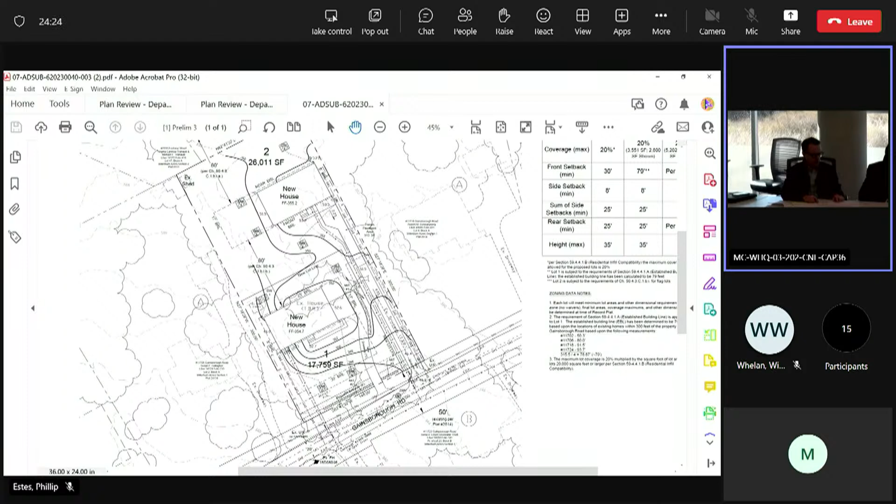Is it also like a visibility issue, is that what you were getting at? It's really just the relationship of the driveway to the home. If you're coming in on the low side and trying to get into the garage on that low side, you end up having to create a big fill area, or put the garage in the basement, which nobody really likes. You can see the contours on that front house where the grade slopes down, because we have that change in grade there. It's not a steep property, but it does have elevation change from right to left, so that becomes an issue.

If you can move the driveway over further away from that property line... and you mentioned maybe using the existing driveway, which is actually right up against that line, so whatever we'd be looking to minimize and avoid impacts from that perspective. I can't speak to that, but just understand we'd have to really be able to make those variance findings and be convinced that there's not an alternative.

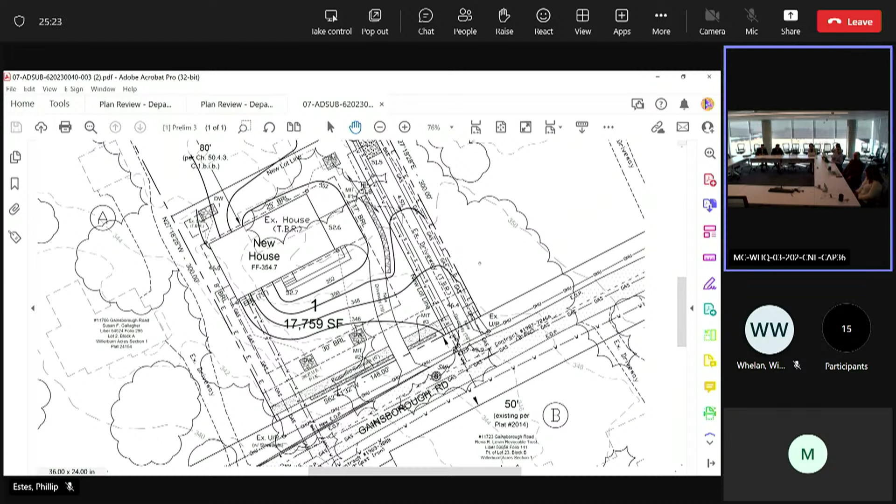So just to elaborate on that point, by using the existing driveway, are you saying that you minimize impacts to the trees surrounding the existing driveway versus having a shared driveway off the property line, which would be a new driveway?

I think that makes sense because we're talking about the driveway that's already there. It's in pretty good shape, it's paved, it would need some widening, and some work for the fire department if it was a shared driveway. We'd have that to deal with, with a wider apron at the front. We'd widen it away from the property line, definitely in that direction. And then you'd have the extension that goes towards the rear, and that's new, not there now, but it goes back quite a ways.

I kind of highlighted it there in yellow, that's where the existing driveway is. It's hard to see on the plan, but it actually goes back beyond those big trees.

What I was most concerned about when we prepared the plan was the utilities we were showing in that area, knowing we'd have to trench through, and maybe we do boring versus trenching for that, or maybe move some of those to the other side perhaps. I was more concerned about those than the driveway.

Yeah, this is Atiq from DPS. We do support the shared driveway comment that was made, I think that makes sense. I think all the reviewers are in agreement that the driveway needs to be shared.

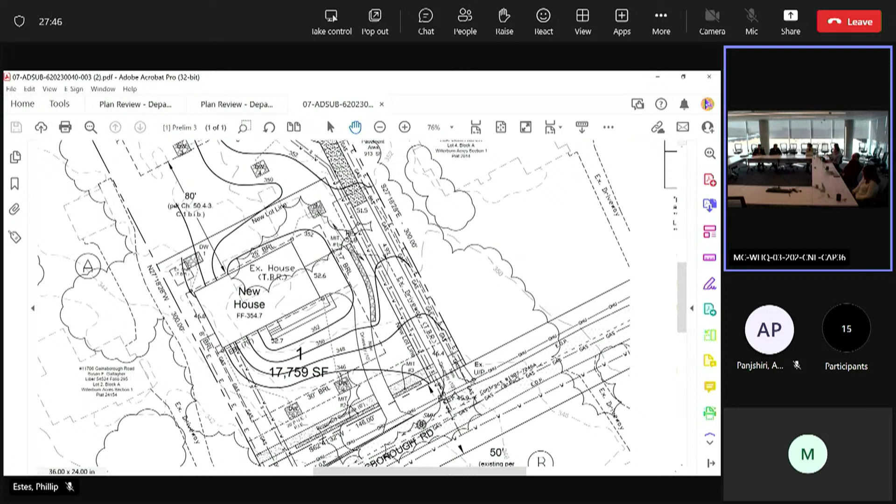So I think if you can demonstrate that you're still protecting the trees and minimizing impacts on the right-hand side, I think that we can potentially support that, as long as it's a shared driveway. I think that's really important.

When you say shared driveway, to what extent - we don't want to get into a turnaround situation with the fire department. 150 feet is our max for shared, which I don't think we'd be running into at this point. Is it the apron mainly, just to not have 2 points of access on Gainsborough that's important?

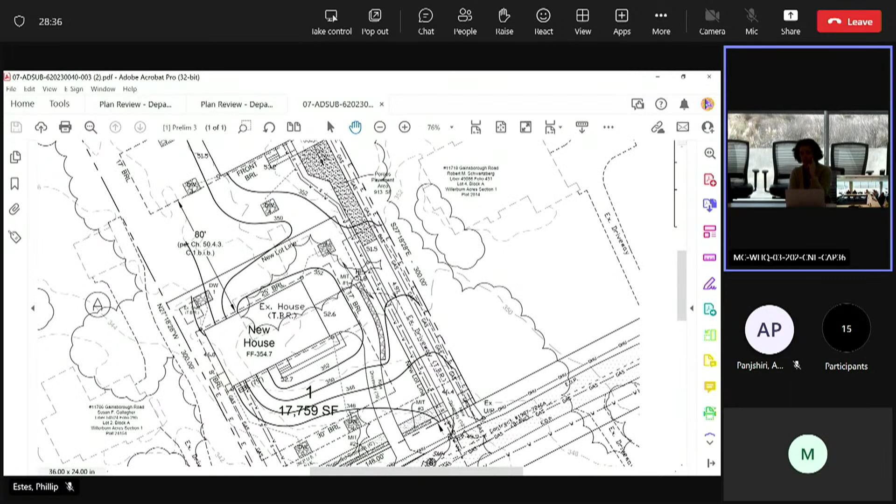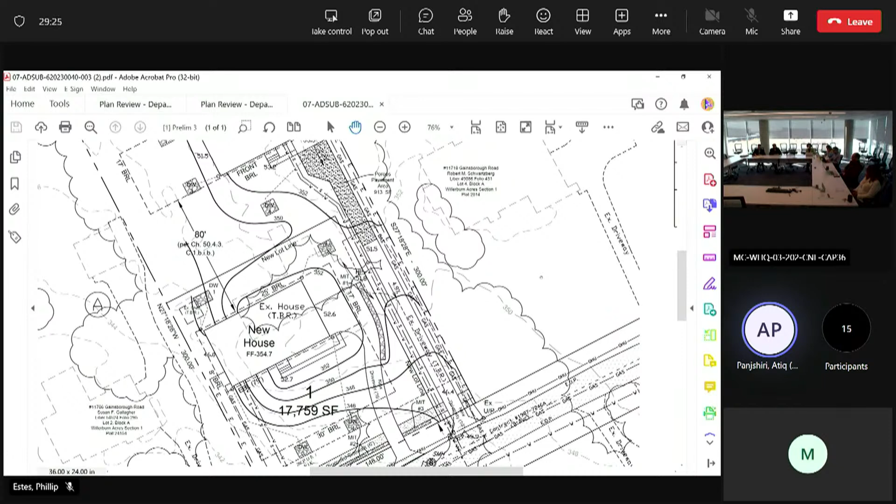If they can accommodate or use the existing driveway as a shared driveway, that will be preferred - the impact on the tree is very minimal. But if that cannot be accommodated, the existing driveway has to be removed and perhaps the new driveway needs to be shared. Our main concern is the curb cuts - 2 curb cuts - and if it's shared, that would be preferred.

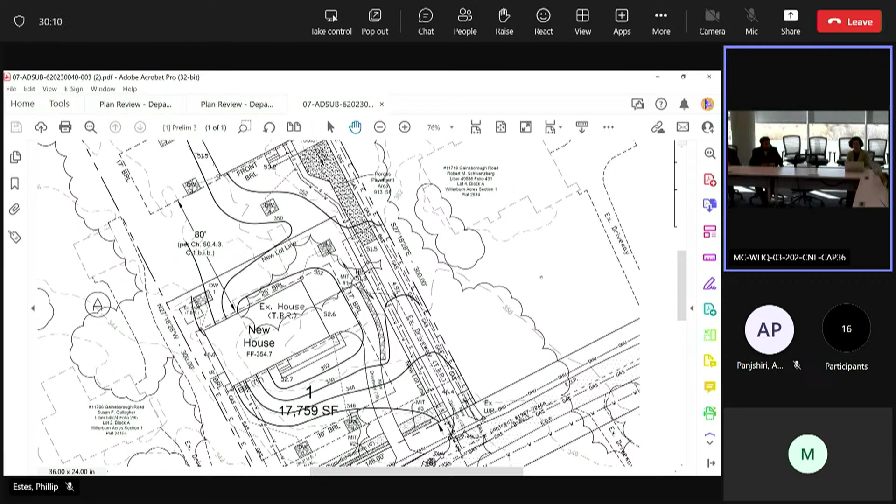Okay, next - I guess these are kind of related to the 15-foot BRL for fire, but also we want to talk about positioning the front house perhaps a little closer toward the street to provide more of a rear yard. That may also be related to Melissa's comments about the infill development not applying here.

Yeah, I'm online. I just wanted to let you know, it's Melissa Goutos from DPS. I'm online if there are any questions.

Great, thank you. So I think we've interpreted the EBL, established building line setbacks, correctly. I don't think we have any relief from that, given the requirements in the code section you referenced. So I think our front setback for the front house is what we show. I don't expect we can move it forward any - we certainly would if we could, but I don't think we can.

And Melissa might want to speak to that. Yeah, for EBL there are multiple methods for determining it. So we could meet and go over the different methods to see if you can bring the house up further to the street the way they're recommending.

Okay, I'll reach out to you and just make sure we're on the same page with that. That would be great. Okay, I'll put my email in the chat just to make sure you have it. Thank you, great, thank you.

What we could also do, if it ends up being that the front house stays where it is, we could move that lot line back some, keeping the setbacks where they are because of the 80 feet separation we have to adhere to, but move the lot line since we have some extra acreage in the back lot.

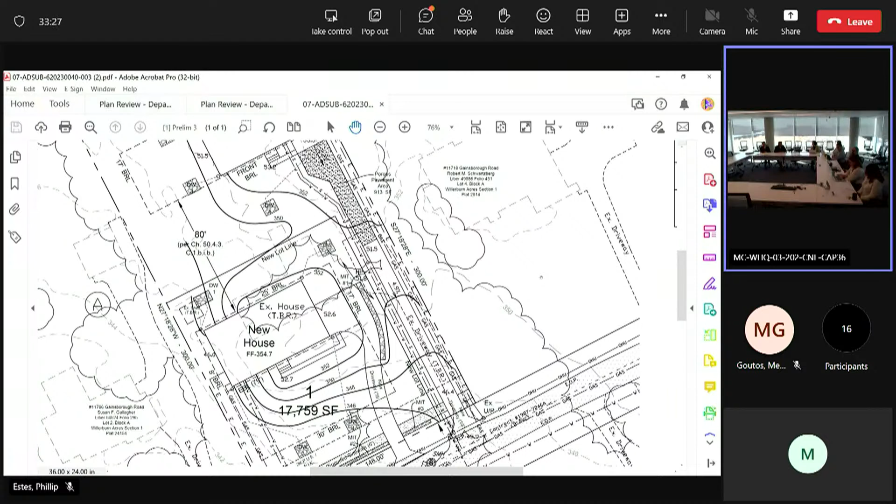From a design perspective, we always like to reduce that width as much as possible, as well as the turning radii. So if you find it helpful to have us on the conversation, then Maria would be happy to join.

Okay, all right. We can move on to transportation. We have DOT here. Yes, Billy Whelan with DOT.

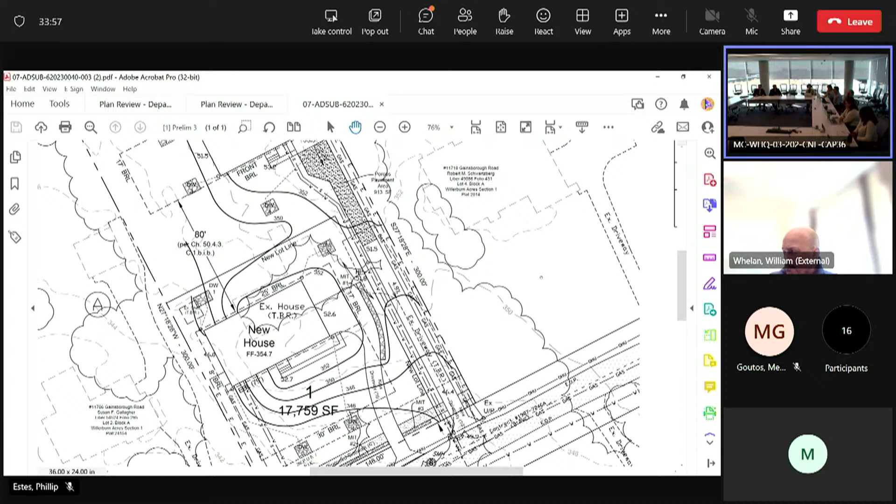Billy, I saw your comments about the road section. If you could explain that a little more, what you're looking for there per complete streets. So it's a 10.5 foot travel lane, but if it's 20 feet of paving, then 10 feet is acceptable. So it would be 10 foot of travel lane on your side of the center line, then curb, then a 6.5 foot green space buffer, then a 6 foot sidewalk.

Okay, so we're going with curb and gutter here versus open section? Yes. Okay, gotcha.

And then that sidewalk would extend off-site. Correct, to the west across that adjacent neighbor's house, and meet the existing sidewalk at the next house. I'm not sure what that address is, but I think the first two homes off of 7 Locks have a sidewalk. They're still discussing moving the sidewalk to the other side of the street. I don't know if that's going to happen.

They're building sidewalk on Gainsborough Road, and that's the review happening now. A lot of the neighbors wanted to move the sidewalk from that side of the street to this side, on 11712. So that could happen as well. The board meeting and neighbors prefer it this way because there's less impact on trees. But the proposal was on the other side of the street, so it's possible it would be moved to this side.

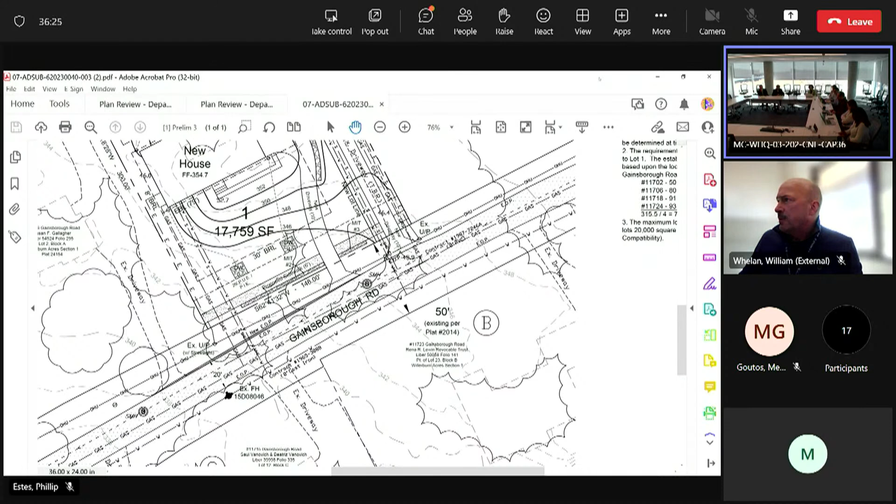Brett, are you on the line here? I don't see him. He's not on. Well, we can look into that and let you know.

I thought we were asking them to extend the sidewalk off-site to the left. They are, yeah, that was our recommendation, right? So why would we be waiving the sidewalk then? Was your question regarding which side of the street the sidewalk should go on?

He's saying there's a DOT project for the neighborhood in general that they've been talking about. You're on the call, so let's ask them about that. Billy, do you have any comments about this, whether the sidewalk goes on the left or right side of Gainsborough Road? I wasn't aware of that.

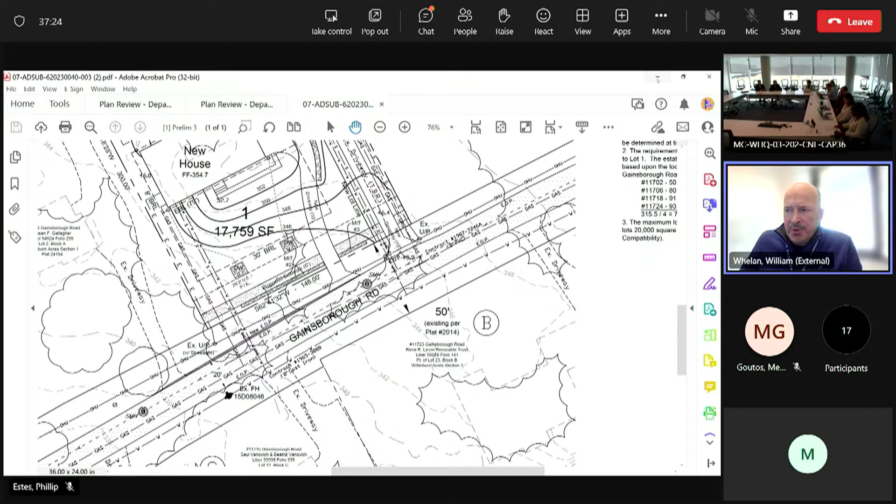We had the same comment, as planning, to put sidewalk along their frontage and extend it across that lot to the west to meet the existing sidewalk for the first couple of houses on the north side of Gainsborough. If you look at the air photo, there's an existing sidewalk that goes 2 lots in, and then you'd create this along the frontage, leaving a 1 lot gap. So it makes a lot of sense to just tie into the existing sidewalk.

I'm not sure why we would waive it. They're trying to extend the sidewalk from the Behrman House, the first house, the big house, all the way through. But neighbors were saying we don't like that, we want to move it to the other side because there's less trees on this side of the street. So it's possible that neighbors will want to put it on that side.

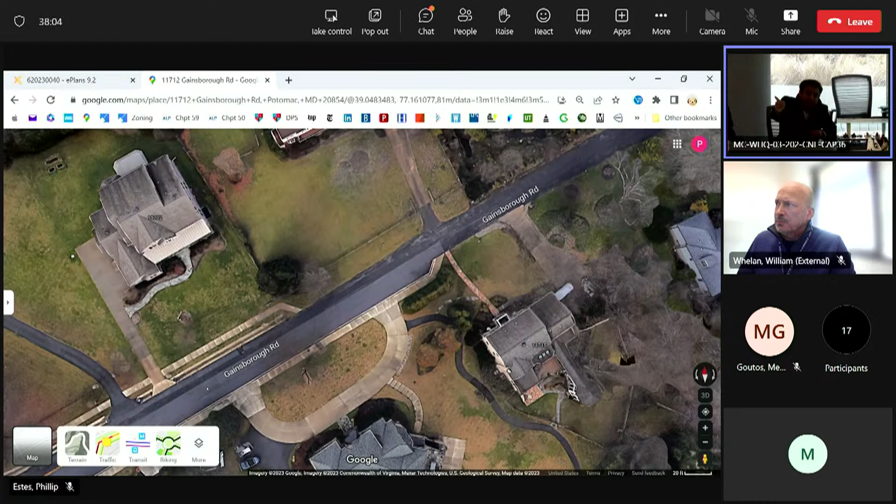Either case, there's going to be sidewalk on Gainsborough, maybe DOT can look into it. Well, the ultimate section would have sidewalk on both sides, so if any of those lots come in for redevelopment, they will all have to put in sidewalk.

You've seen it, they sent the plan out. I have it at home. Yeah, there, you can share that with us. We're more than happy to look at it.

Okay, I think from a general policy direction, we want sidewalks. There's an important connection to be made here, and so that's our recommendation. We're happy to look at what you have, but just keep that in mind.

As of now, they sent out the proposal for this side of Gainsborough, not that side. There may be sidewalk planned on both sides ultimately. They only want to do one side - who is they? The county. The county is here, they're on the call. So maybe you need to communicate with DOT and understand what's planned.

This is Rebecca from DOT. If the county has a CIP, that's one thing - that's asking the developer to put sidewalks on both sides, or put sidewalk on their side of the street and connect into the existing sidewalk. So the CIP is separate from what we actually ask for in development review.

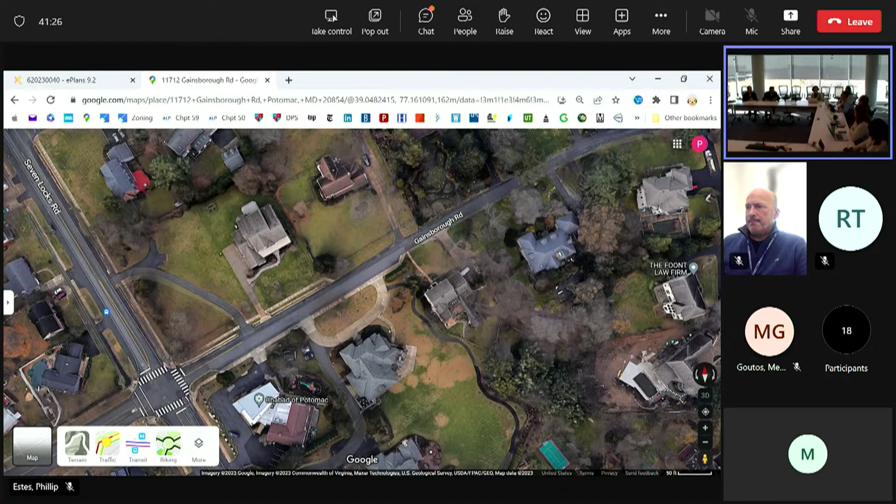For two reasons it's going to the planning board. One is that it's a flag lot, so that has to be reviewed by the planning board. Two, we already have two protests from two different neighbors. Did we share the letters with them, the community letters, or was it just phone calls? I think it was just phone calls.

Do you know which neighbor that was? I know of the neighbors. The first call, she did not identify herself, so I'm not sure who it was. But the second call was from the neighbor to the right. I know all the neighbors on that block, so possibly the neighbor across the street - she's opposing the sidewalk as well.

No, opposing the sidewalk as well - her concern was the flag lot. She was opposed to... I just think he's saying the sidewalk project she's opposing is what I'm hearing. She also opposed the other three lots that were subdivided, lots 1-3.

So she likes to oppose it. But I don't know anyone - I know all the neighbors on that block, and everyone I talk to is happy. They'd rather see a beautiful house there rather than a house with septic and well.

This is Rebecca from DOT. Can we go back to the plan again? Sure.

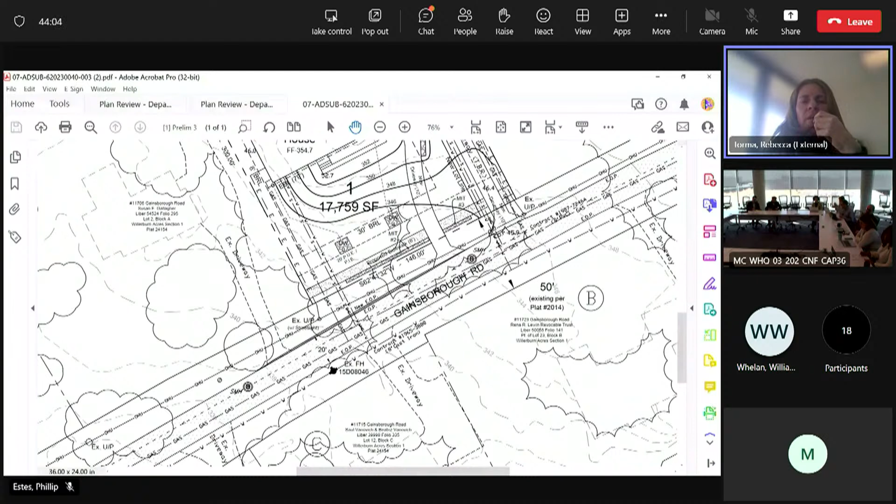Okay, so they need to move the sidewalk inside the right of way. I don't know what that thing is next to the sidewalk - did we talk about that at all? At MIT number 3? That's stormwater management. I don't think we can put that right next to the sidewalk.

I don't know if stormwater management's on the line, but - yeah, Rebecca, this is Mark Etheridge. We've asked him not to put that in there. Okay, so the sidewalk just basically needs to be aligned with what we have down the street, and hopefully it won't be on the curb.

Okay, you got it. Just to finish on the planning board note, I was checking the schedule, and your date would be May 25th. The last Thursday in May is 90 days from the submission date, so keep that in mind.

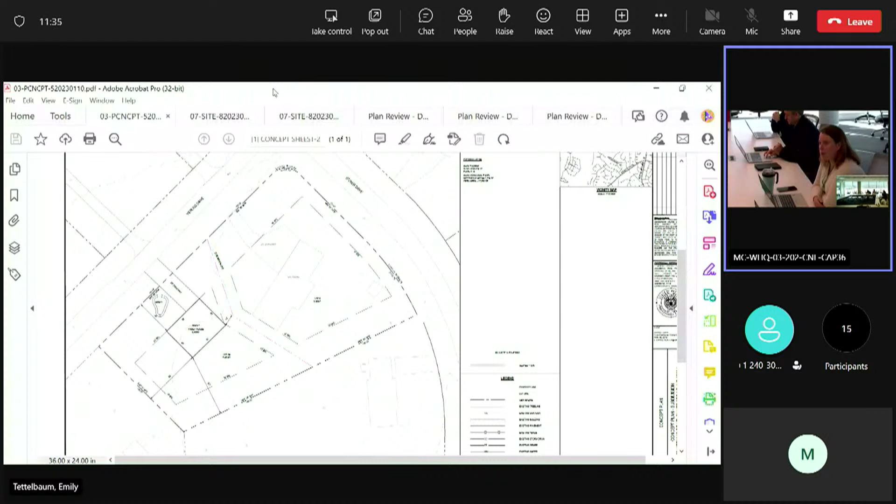The purpose of this meeting is for the applicant to ask any questions they might have based upon the comments you received. I will turn it over to Emily first to highlight some of the larger issues, and then really this is the applicant's meeting. So go right ahead, Emily.

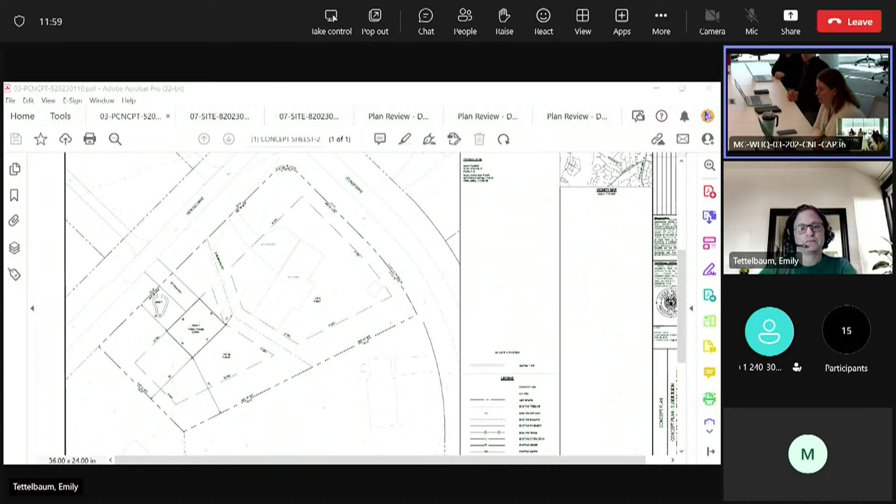Thanks, Christina. Good morning, everybody. Thank you to the applicants for submitting this concept plan to us. It really helps if we can see these projects ahead of an official submission. This is a 2-lot subdivision, and we reviewed it based on the information submitted, and we really didn't see any red flags. We did have a lot of comments from various agencies, and we're happy to answer any of your questions, but I don't see any major comments that we need to flag for you at this point. We're ready for the questions you have for us.

Okay, Leandro? Ivan, do you have any questions as far as the subdivision? This is Ivan with DMV Civil, the engineer that prepared the drawings.

I just had a couple questions as part of the preliminary plan that we have to submit. Do we have to do a brand new NRI and FSD and forest conservation plan for this little minor subdivision, or?

Hi, this is Amy Lindsay. I just wanted to say, yes, you do have to go through the forest conservation process. In order to submit even a minor subdivision, you need to either have an NRI, FSD and forest conservation plan, or a forest conservation exemption. So either you need to go through one of those processes prior to submitting your plans.

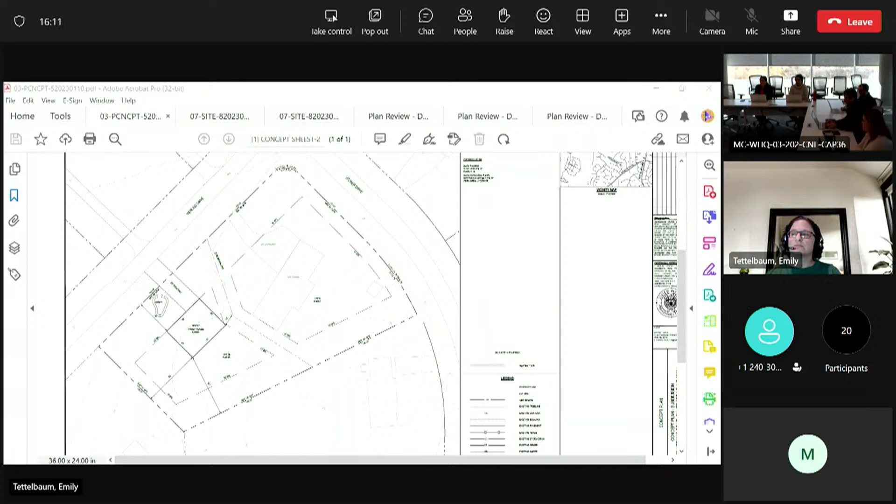And well, I can tell you that this subdivision will not trigger a requirement for MPDUs. You might have to make a payment into the housing fund, but I can find out more information for you about that if you would like. I'm guessing that the housing planner just didn't have any specific comments about this.

Right. So I guess the main question here is that if this is, from what I'm seeing, very feasible - there's pretty much nothing that I can see here that suggests that it wouldn't be approved, right? Based on the information we have right now, we didn't see any other major issues with this. Again, once we have all the information, there might be some additional concerns that come up, but based on what we have right now, this looks feasible, yes.

Yeah, so I mean, I guess the main thing that we want to get out of this meeting is to know if this is something we should pursue or if it's something that's not going to happen.

Well, that decision is up to you, but based on what we're seeing right now, we didn't see any major issues with this subdivision. So, we definitely don't have any major objections to you submitting an application for an administrative subdivision at this point. I mean, not to say that something won't come up, but from our look at this, besides the comments you see, we didn't have any major issues with it.

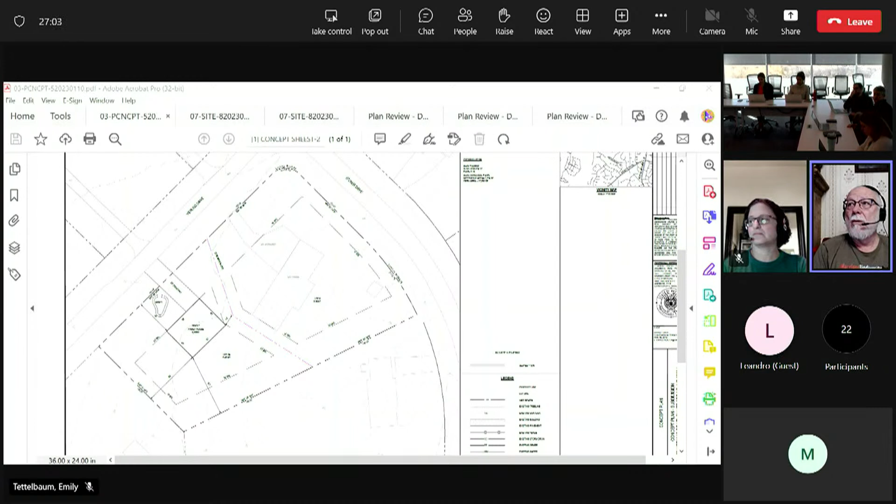So we're not allowed to support a subdivision that requires a waiver for this type of use. We don't know what the house type's going to be, obviously, at this point, so we're looking for reasonableness. Someone comes in 3 years after the subdivision is approved, and it's a lot of record, and they build a house that they can't achieve full stormwater on, we're not going to send them back to the starting gate. But we need to see reasonableness here.

So we're going to do soil testing. It's going to be infiltration testing, not the typing that you probably did before. And if the soils are not good, you'll have to find another method that might be acceptable, planter boxes or something of that sort to provide stormwater management. Okay, all right.

Is there anything else, Ivan, Leandro? No, I'm clear for now. I appreciate all the input. Yeah, we're excited to put this in front of you shortly.

If you like the reference that Rebecca Torma was discussing, it's in the subdivision code. It's 50.4.3.d, and it's about side lot lines. I'm sorry, can you repeat that again? 50? Yes, it's in chapter 50, and it's 4.3.d.

4.3.d. Chapter 50 says side lines of interior lots must, to the extent possible, be aligned perpendicular to the road line or radial to a curved road line. So obviously this doesn't conform exactly with that.

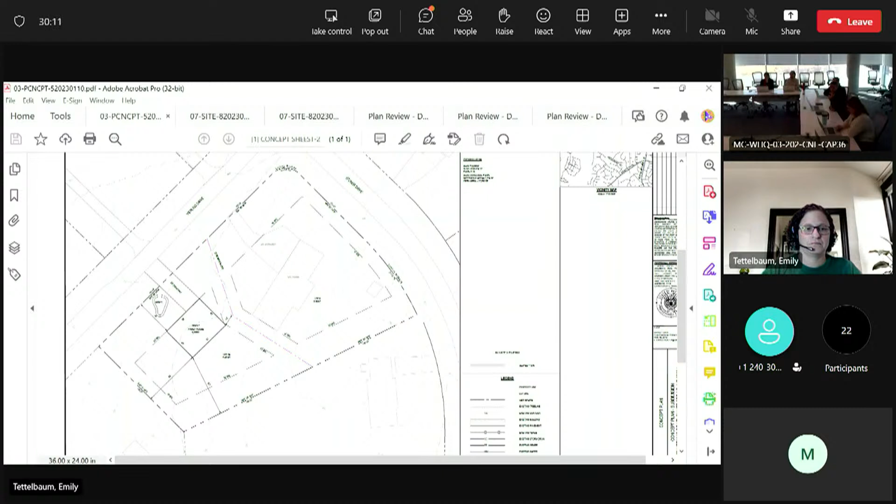I don't have any more questions. Does the county, any of the reviewers, have any other comments? All our comments should be in the document that was sent to you or within ePlans. If anything comes up, feel free to get in contact with me or any of the other reviewers. We'd be happy to answer any of your questions. All right, that does it for me.

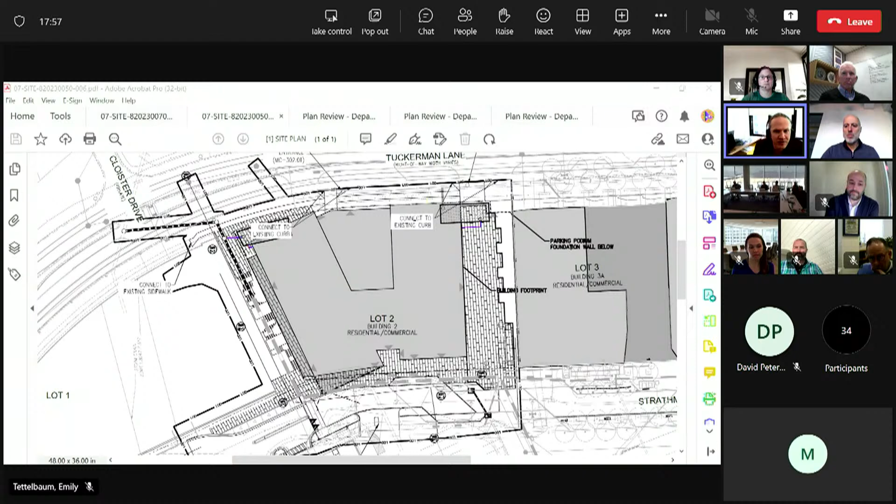Great, thanks, Andy. Emily, can I share my screen? Yep, you should be able to now. Okay, can you see the blue slide here? Yep, we sure can.

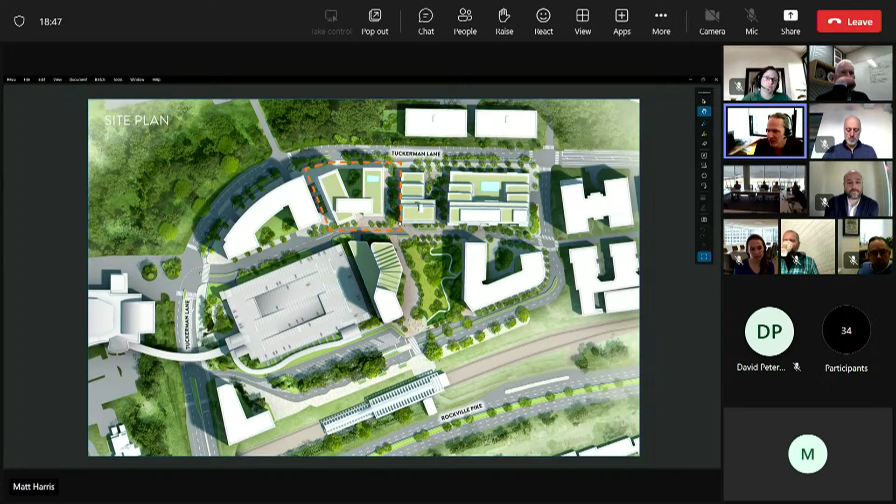So as Andy mentioned, thanks everyone. We have a number of technical comments that the team is responding to, and we identified a few areas for discussion today. The first is on parking. Just to reorient everyone, the site we're talking about is here - this is lot 2, outlined in orange. The building's 2 towers over 1 parking garage in the first phase are under construction now, as is the first phase of the park, which is really the entire 1.2 acre park that faces the metro station. So we are going to talk about lot 2, and following us, the ESL team will talk about lot 5.

One of the things we wanted to discuss was there's a comment in E-plans about our range of parking, and we wanted to speak to why we are requesting a range of parking. I think we are all aligned with the county to strike the right balance of parking here, and probably to the extent we can limit the parking, as this is a transit-oriented development on a site owned by WMATA at a metro station. So we think we're aligned in the limitation of parking. That said, this is outside the Beltway, and so we are trying to strike the right balance of what the residents of this community would need in terms of parking and limiting parking. This early phase of the design, we haven't finished design development yet, and we normally have some coordination issues that come up along the way that affect parking up or down. So we want to respond to that comment as to why we requested the range of parking. It was really driven by costs on our side, trying to thread the needle between the right amount of parking for our residents and limiting the parking, as it's not a huge economic incentive for us to provide.

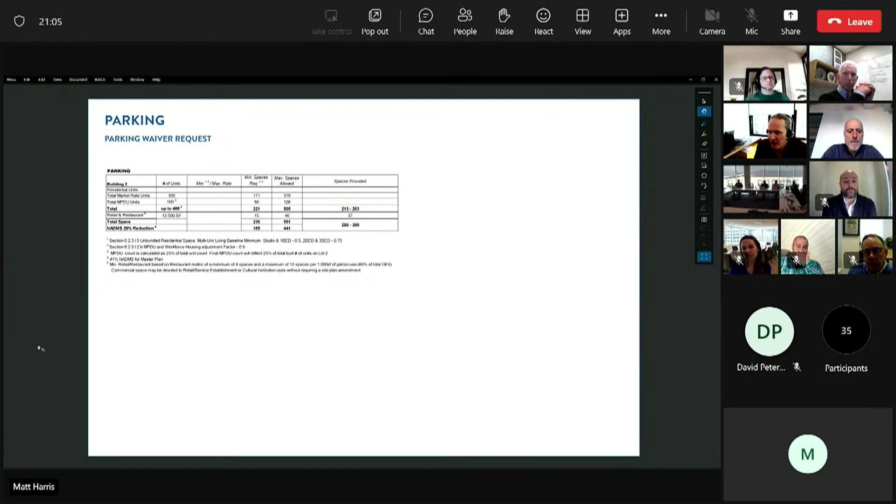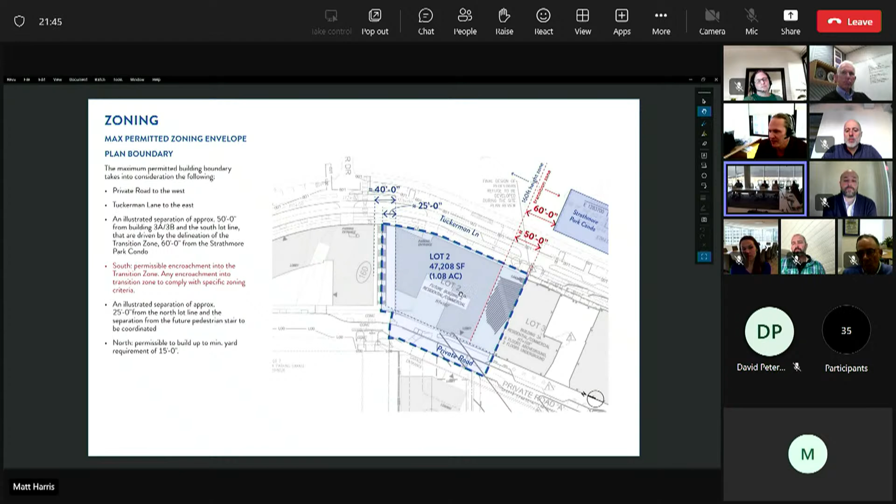We have some very minor bay projections in the transition zone. This diagram shows everything in red, which represents all the massing that would conform to the transition zone if we were to build fully out to the lot line.

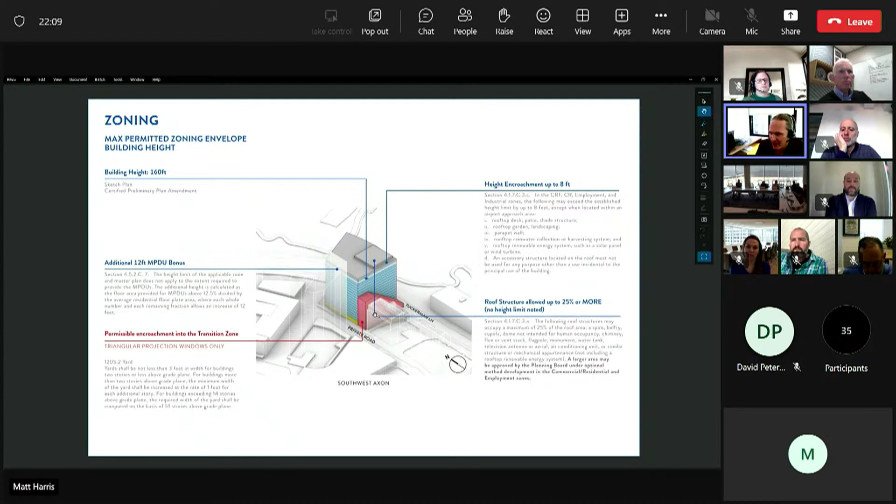We are not proposing that in this building. What we are proposing are some minor angled projections, shown in this diagram, that all fall within that transition zone. None of those projections go above the level of the transition zone where that zone exists. So Emily, we can submit these diagrams formally to show this.

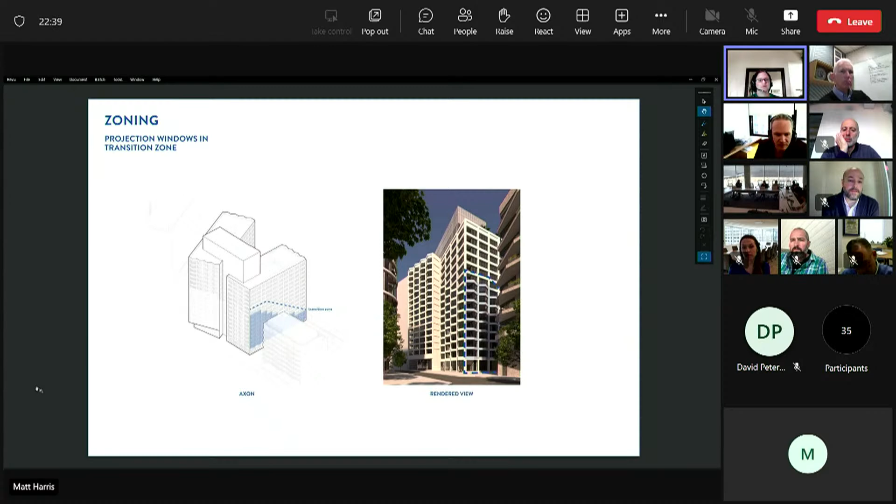The last piece we wanted to speak to is the Tuckerman Lane design. It was in our first informal meeting with the county something that Park and Planning told us they were very interested in us studying in great detail. The design team has spent a lot of time trying to get this just right. So I'm going to turn things over to Arno Atkins, who is the partner in charge from Cookbox Architects, to describe where we're headed with that.

Thank you, Matt, and good morning, everyone. Really appreciate the time to speak with you all and the feedback that you provided. Looking forward to collaborating as we go through the process. I just want to speak at a high level and address some of the very thoughtful considerations that Natasha Fahim had outlined in the comments. I'll move fairly quickly, but I am open to feedback as I go along.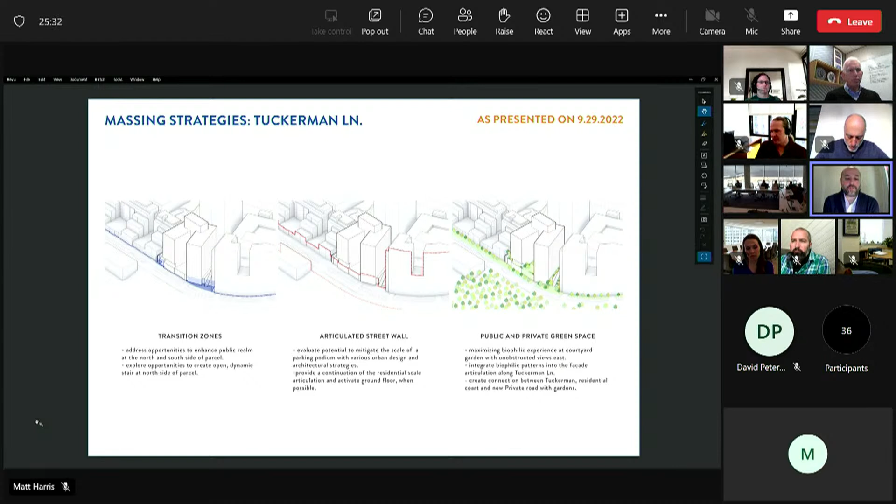On the next slide is a quick diagram that speaks to the really long frontage we have along Tuckerman, and how bringing both residential towers down to grade and grounding them helps mitigate that Tuckerman frontage and really break it up, which we thought was very successful and got really positive feedback on in our informal meetings.

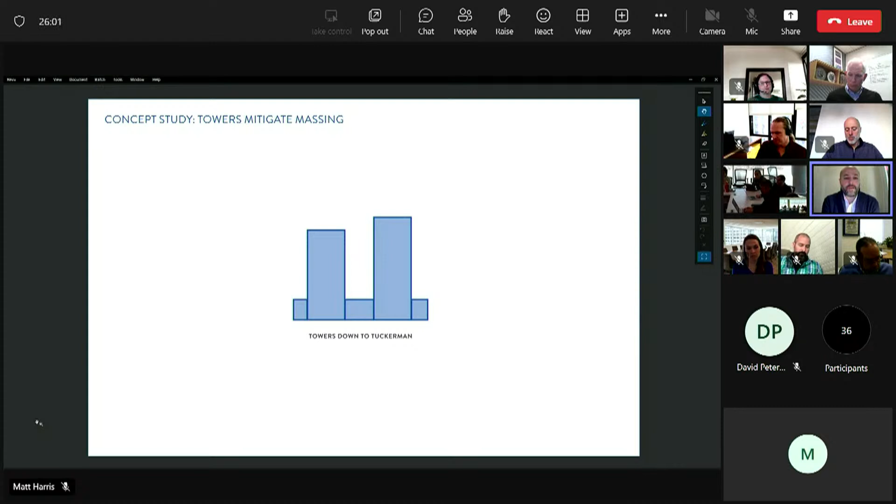This next slide outlines the overall massing that you all saw in the submission. In the center is a portion we call the center spine, labeled here as mechanical bulkhead, which rises up between the 2 towers and unites them. On the south is our amenity roof, the south tower with amenity roof, and on the north is our taller north tower at 172 feet with an amenity roof. Those come down and engage the Tuckerman podium, similar to the diagram we looked at previously.

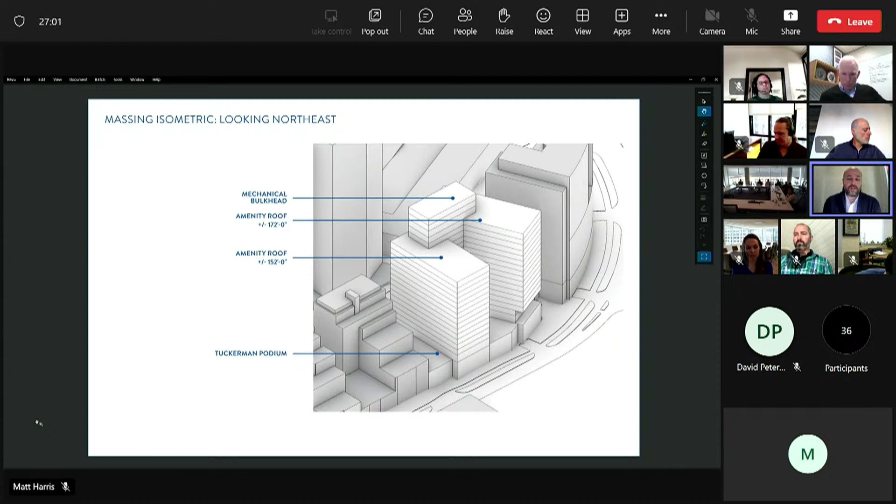The next slide looks at the same massing parti, but now towards the north, so you can see some of that height transition from 3A, 3B to our parcel to the future parcel 1. You can also see how the towers come down, how the podium sets in and aligns with 3A, 3B, then the tower reads coming down, with some of that transition along the overall Tuckerman facade.

Where we spent a lot of time focused on the activation at Tuckerman is at the north side, where we have a plaza condition created, how we articulate and activate that north side, and then pull that activation up through the new grand stair and connect it to the spine road and a pause point at the spine road.

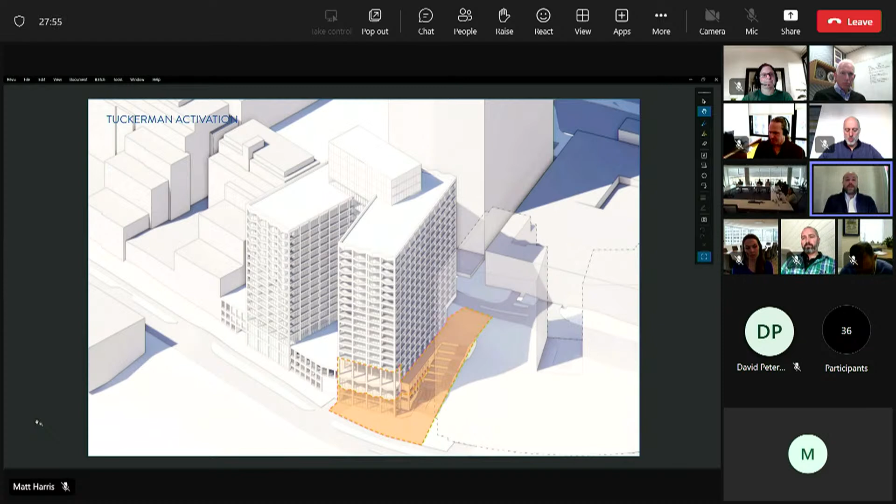Looking at the P1 plan, this is our entry plan off Tuckerman. On the left-hand side of the screen, which is Project North, we've got the amenity space, which opens up into that plaza. We have the front of house bike parking, storage space, which is also accessed off the plaza. And then you can see the start of the grand stair cut away as it rises up.

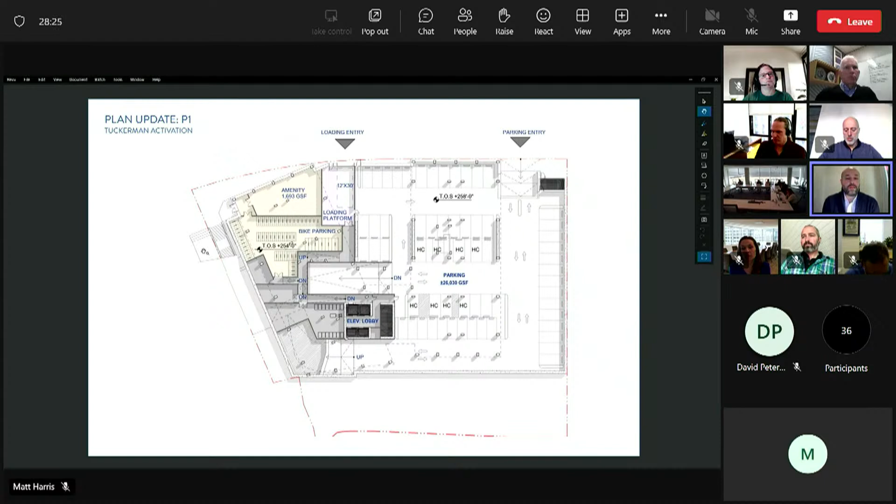We're going to zoom in and look at that amenity space very briefly, to talk about different types of activation. We're looking now at the enlarged plan that shows your Tuckerman amenity, your bike storage, all fronting onto the new plaza condition. These are very schematic drawings, and we've been continuing to develop those with 5 Squares and a landscape architect, Mahan Rykiel. This is what we had pre-site plan submission.

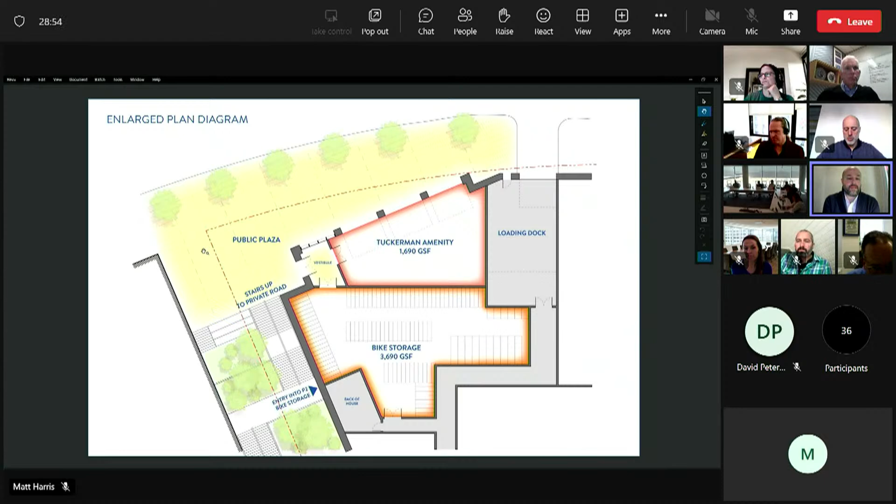The next slide shows some of the tools or strategies that we have to really activate this space. With the upper left thought bubble, we're creating a really positive indoor-outdoor connection between the amenity and the plaza, the ability to have public gathering space at that stair, so it has a multiplicity of functions.

The Tuckerman amenity could be a health and wellness-based type of use. It could potentially be something related to the Strathmore Music Center, or where we kind of landed on and talked more in depth about is really a bike amenity, a start of ride or end of ride, with the adjacency to some of the cycling possible at Rock Creek Park, just a short ride away, and how that would be a real amenity for the community, but also for the new district.

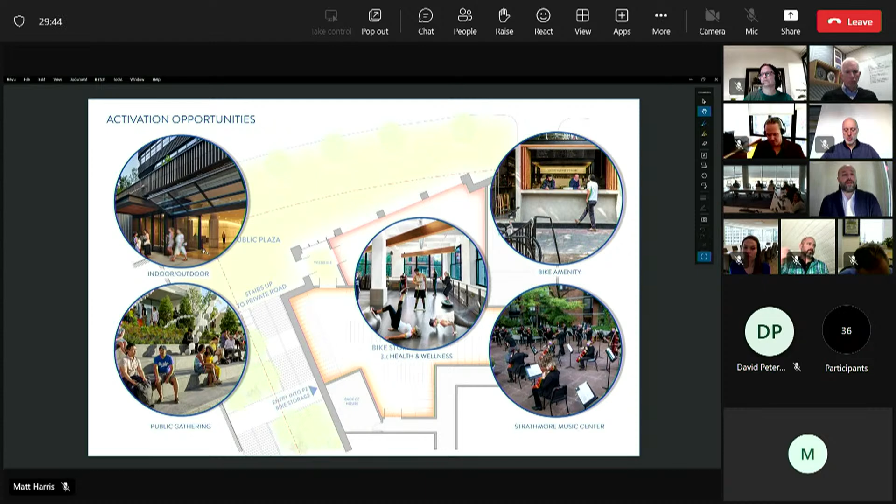Stepping from the plan to more of an overall perspective at Tuckerman, we're at the north side, looking towards the south, towards 3A, 3B. You can see diagrammatically that grand stair gesture, the tower coming down, and some of that schematic facade articulation.

As we zoom in, we're looking really at that white box view that talks about facade articulation, the transparency, and start to see the massing of the plaza and the stair, and some of that articulation of the wall going up against the stair with some depth.

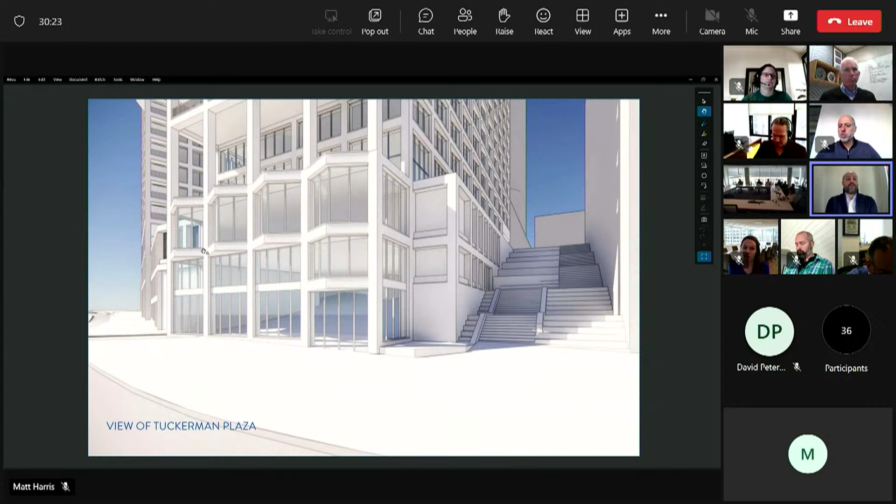This next view is the fully rendered view that we had previously shared with the county that illustrates what this space could one day become. You've got your dedicated bike lane, your landscape plaza, your amenity shown as a double height here, opened up onto the plaza, and this really fantastic stair, which we're continuing to design with our landscape architect Mahan Rykiel, rising up and switching back with landscape throughout the whole gesture.

That's a look at our plans as of the site plan submission. As Matt had shared, we're in design development. We continue to design and look at articulation and activation along this facade.

To address some of the other comments that Natasha had shared, we're going to continue to create additional materials that we can provide as an exhibit, looking at the other side of the Tuckerman facade, so you can see the introduction of landscape, the change in the scale of the frame that you see at the towers, and how that translates to the podium, and illustrate some of our thoughts and intentions for the design of the building.

If we keep going forward, Matt, I can quickly outline some of those concepts for the team that we continue to develop. The first is the introduction of public art onto the facade as a means to activate. These are three different examples that we had pulled out pretty early and shared with you all back at the end of September. Some of them are mural-based, others are installation.

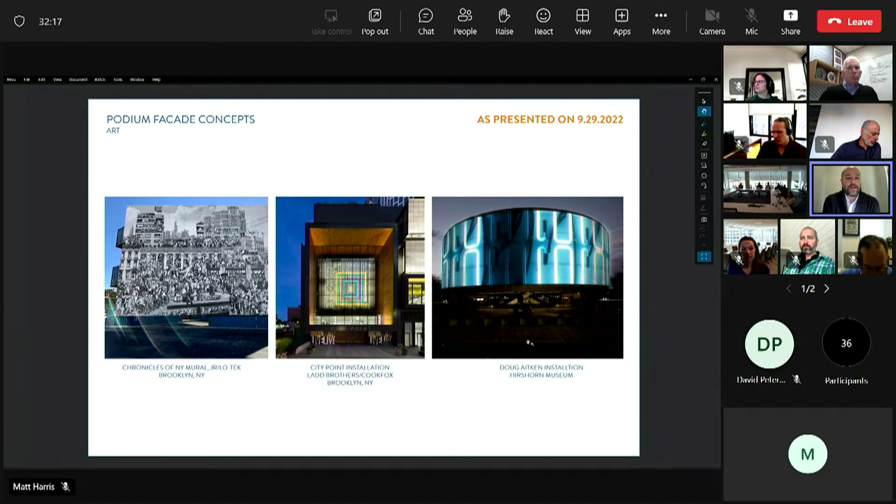The next strategy that we had outlined is the introduction of nature or garden, looking at three very successful projects that had introduced some type of architectural landscape into the project.

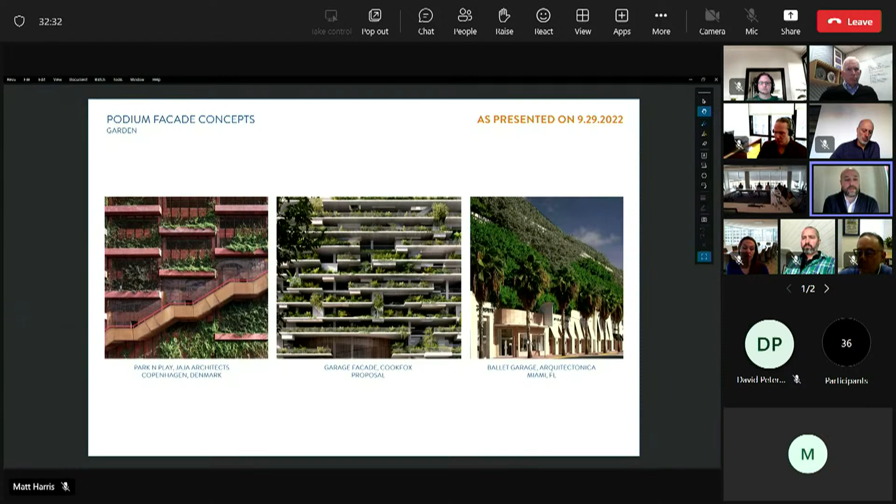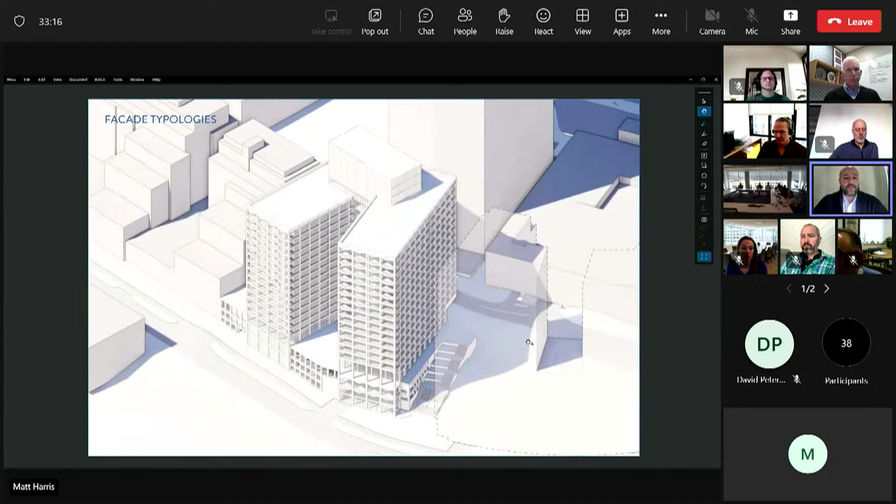And then how we apply these concepts, I can illustrate quickly over the next few slides. So again, looking at the overall massing, and identifying the areas of focus. On the upper right-hand corner is our residential facade type, highlighted in purple, coming down and grounding the towers. Facade type 2 is the garden, introducing a garden between the two towers at that parking, which relates to the landscape at the residential courtyard. Facade type 3 is the public art or mural at the base of the south tower. And facade type 4 introduces screening and landscape as part of the transition zone between 3A and 3B, which will be heavily landscaped as terraces, bringing that idea across the transition zone at the south.

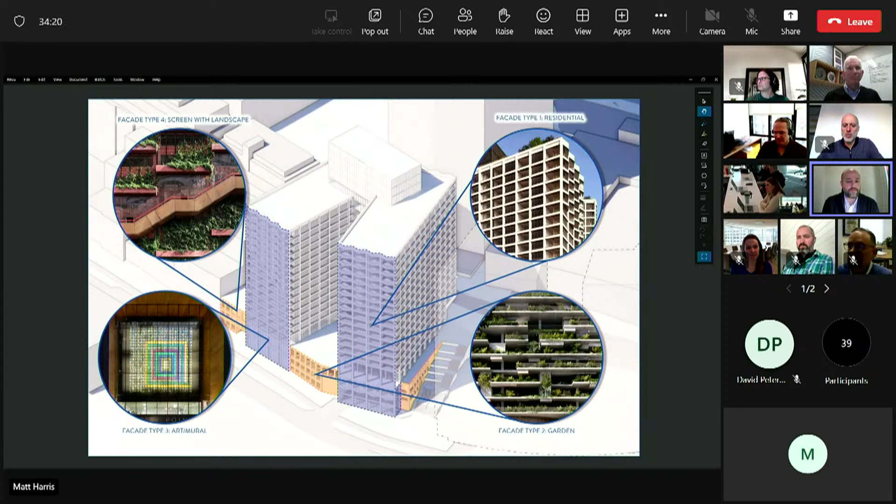Okay, and I think that probably wraps us up. I think the next slide, which should be our final, takes us back to the rendering we prepared before the submission and shared with the urban design team at the north side. So moving forward, our intention is to add more clarity to our design intent for the follow-up submission with additional rendering, illustrating more of the conditions along Tuckerman at the south side, as well as more clarity in the drawing itself, outlining the strategies I've shared here today.

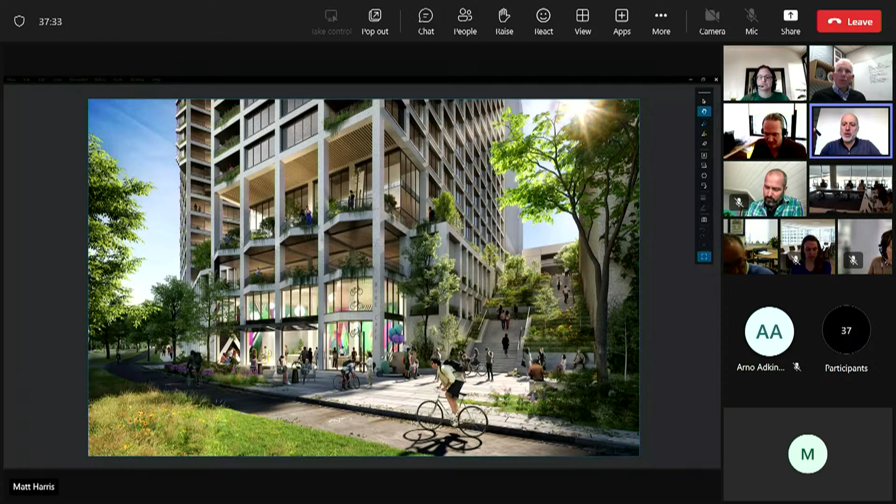Thanks so much. And Emily, I'll just note one thing - we can get into more detail on the 5,000 square feet. We are working with Strathmore right now in a space planning exercise. We meet with them weekly, so over the next 30 days we'll be able to more precisely know what seems to work. But our intent right now is working toward that for building 2. Okay, fantastic, thanks.

Okay, so moving on to building 5. This is a proposed senior housing building that has independent dwelling units as well as assisted living and memory care. It is in the middle of the property right next to the central park that is currently under construction.

So this was a little confusing to review because there were a number of inconsistencies between the statement of justification and the plan. So for your next submission, you would just make sure that all the numbers are consistent across those two. That would help a lot.

I'm a little concerned about the height of this building and how you got to the 325 feet. It might be that some of the top levels aren't even really considered building height, and hopefully you can work with your attorneys to figure that out, because it would be over 2 floors above what is allowed - the technically allowed height of 300 feet for this building. So it would be hard to justify that, I think, using the MPDUs for this building, but I think we can work that out. Again, I'm thinking that at least part of those top floors are probably not actually considered building height, but we can figure that out.

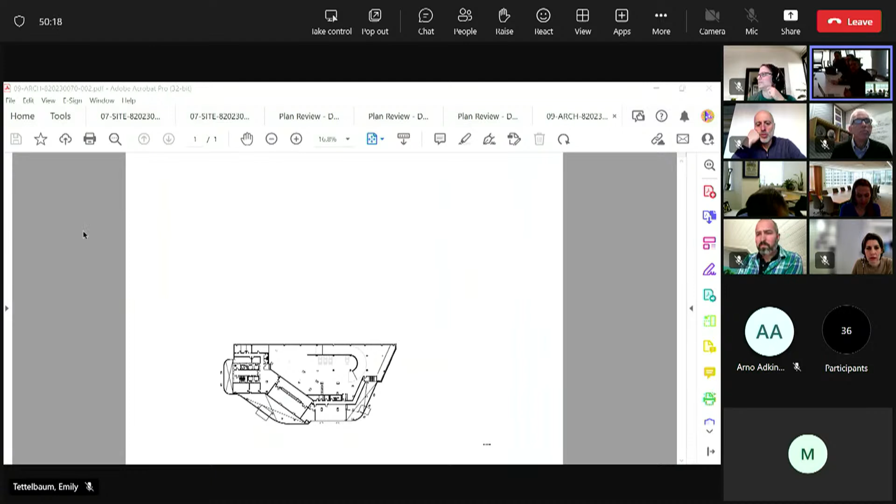If you could zoom in tight enough to see the whole level - there were some spaces that were parallel, kind of on the bottom left side of the screen, particularly that last one, trying to understand how the cars will be pulled in and out. With the building columns and other cars in the space, it was difficult to get a good sense of how things will work. Even seeing some turning templates for passenger vehicles, how they get in and out of those spaces, would be helpful. Another one in particular is that last car on the right side of the screen, the lower of the two tandem spaces all the way over to the right - it wasn't clear there was enough room for that to back out given the column and wall right behind. So we're just trying to get a better sense of exactly how everything will operate on the garage level.

That about covers it.

Okay, great. Any clarification from our team?

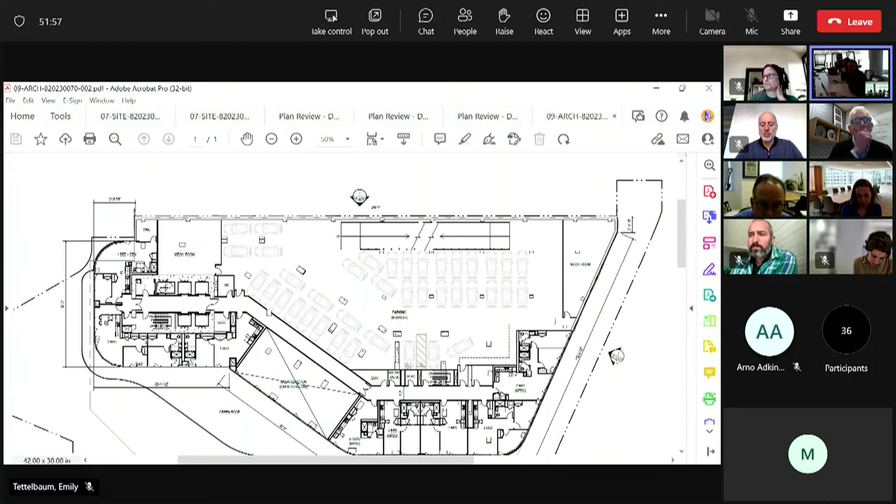It sounds like, Matt, you're just looking for more of the turning maneuvers and diagrams that illustrate the movements rather than a narrative. Yeah, exactly, and I think it could probably all be handled illustratively. We understand that with valet parking you don't have to provide striping within the parking spaces, but maybe even just dashing in a drive aisle area that shows there's enough room for the cars to circulate. It's probably all fine, it just looks pretty tight. And with the loading vehicle, there may also have been some conflicts with the building walls, so just take a careful look at that where the trucks are coming in and out.

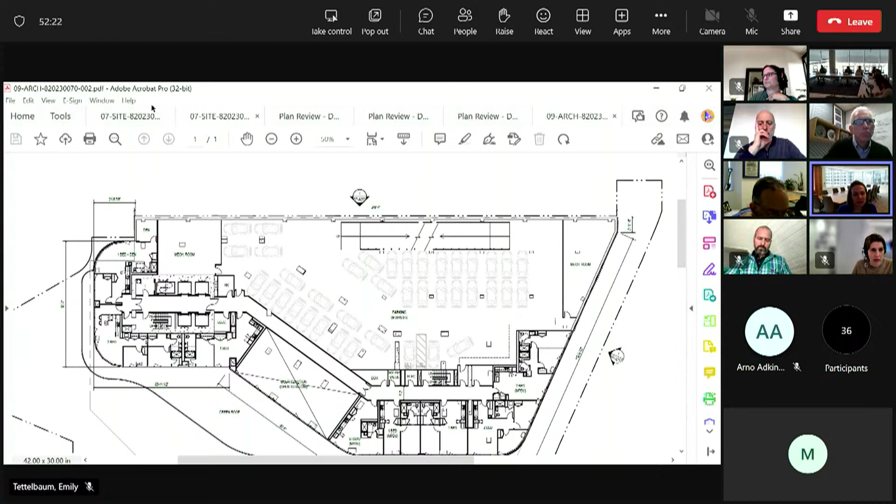And then I think last on our list was really just to note the urban design team comments we received. Thank you, Natasha, for your thoughtful comments as always. We appreciate it. We are evaluating these in greater detail now, and these are comments we think will warrant a follow-up, more detailed design discussion meeting. We're glad staff also appreciates the amenity being provided by this project with that grab-and-go cafe. This is something ESL is committed to making publicly accessible. We're happy to provide some additional information with our resubmittal regarding our current thinking about the operations of that space. Some of it might not get finalized until later, like the exact hours of operation, but we can give you a sense of what we're thinking at this stage.

There were comments about sustainability. The goal for this project is LEED Silver. We can certainly provide more sustainability details on our strategies with our next resubmission.

There were a couple other comments we'd want to coordinate with you, Natasha, and your team through a follow-up meeting, in terms of the porosity along the facade facing Central Park. We certainly share staff's goal to activate that space, but we need to balance the goals of porosity and activation with the security and safety needs of the residents. That's something we want to talk with you all about. I know you had comments about the amenity deck and the mechanical screening, so once we dig into those a bit further ourselves, we can set up a follow-up meeting to go over them in greater detail if that works for staff.

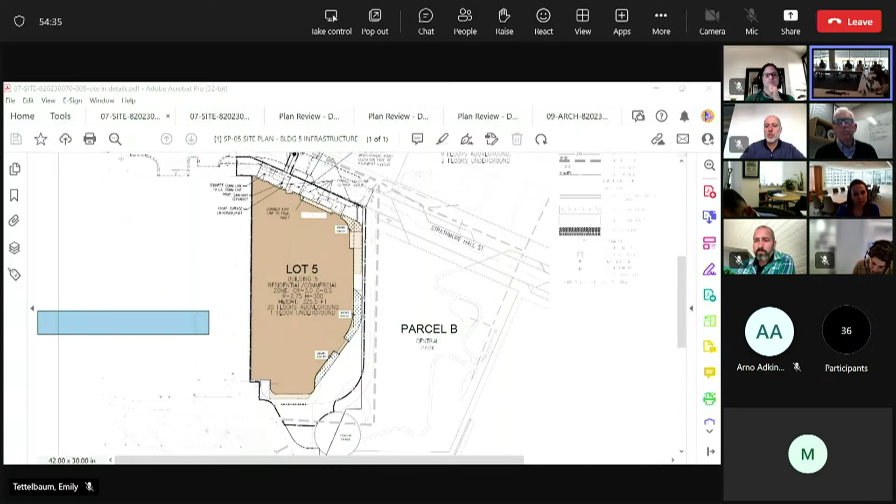Liz, this is Natasha from Mid-County, the urban designer. Thank you so much. We're looking forward to that discussion, but just to summarize, I think the way you summarized it covers all of our comments. I just want to emphasize the nice tower you guys are proposing - 300 feet tall, easily seen from miles away from Rockville Pike, and I'm sure visible from Wisconsin Avenue as well. The architecture you're providing, with a really nice crown with the fenestration and LED light, I think it's going to be fabulous.

Great, thank you, Natasha. Yeah, I know the architects are looking into that further, so once they have a chance to flesh out the details, we'll probably want to come back in and discuss with you all. Or if not, if we think it doesn't warrant a meeting, we'll just include the additional information in our resubmission. Yeah, perfect. Thank you, Liz.

And that kind of wraps up the comments we wanted to discuss today. So I guess I'll pause to make sure, Bill, Steve, that I covered it all. Is there anything else you wanted to add? That's what I had on my list. Okay.

So for both of these, it sounds - do you have everything you need to make your resubmission, or do you need a follow-up meeting? I think we have everything we need on both of them. At most we would schedule just a follow-up design meeting with urban design and park and planning staff. But otherwise, I think we have all the information we need, and we can reach out separately if we end up needing those meetings.